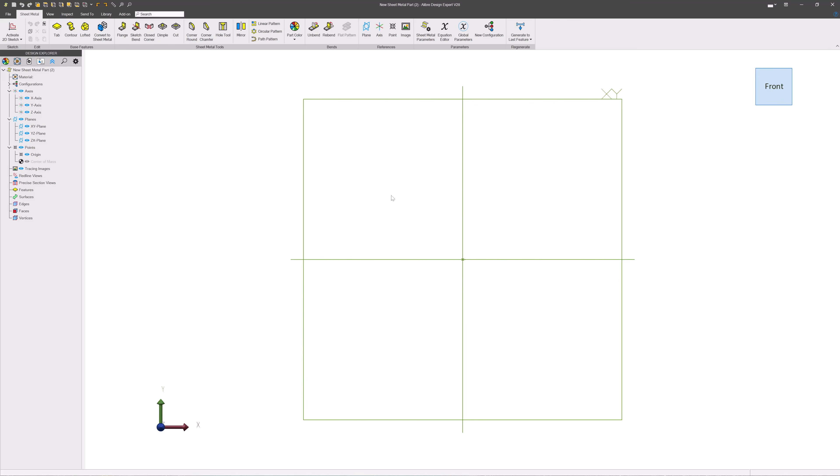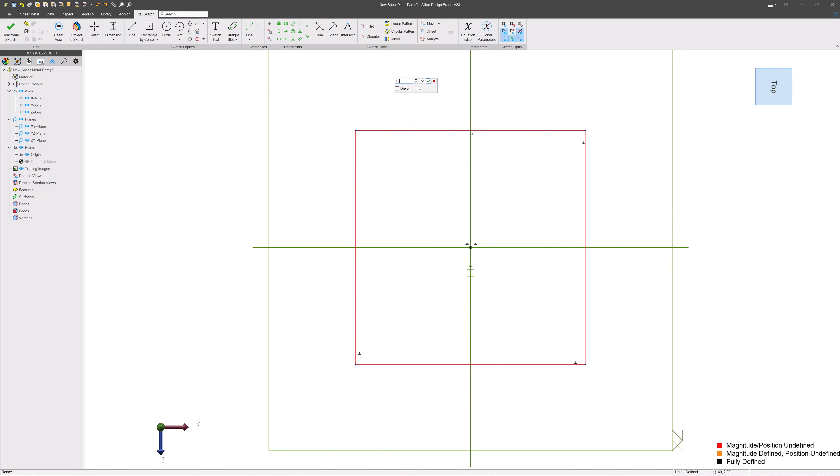So let's go onto this plane here and start a sketch. I'm going to grab a rectangle by center, and just start from the origin and form my rectangle. From here, I can grab a horizontal and make sure that one of my lines is horizontal. Then I'll grab a dimension and give this dimension, let's say 16, and we'll go 10.

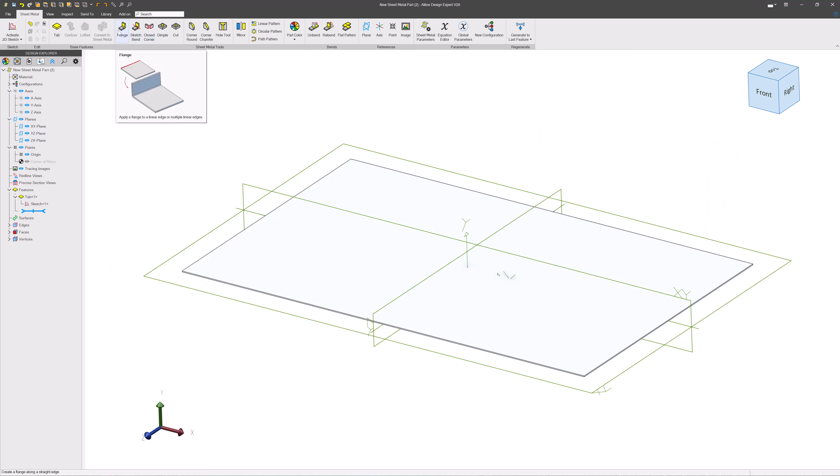Just like that. From here, I can grab a tab, so we'll say tab right there, and that forms a base part, or a base tab. So we'll grab a flange because we want to add some bends. Grab a flange right there, and just like that, we have made a bend.

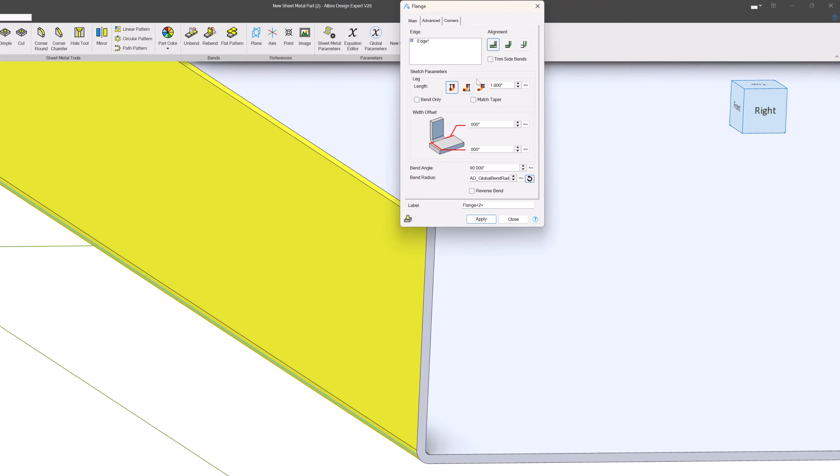Now, how do we want to make this? Well, I can say that I want this outer face to align with this edge, so we move the whole sheet metal part back a little bit and have this outer face be the new outside, like that. Or I could say I want this inside face to align with the edge that I just clicked, like that. Or we can say I want the bend, this little tangent point of the bend, to start at the edge that I just clicked.

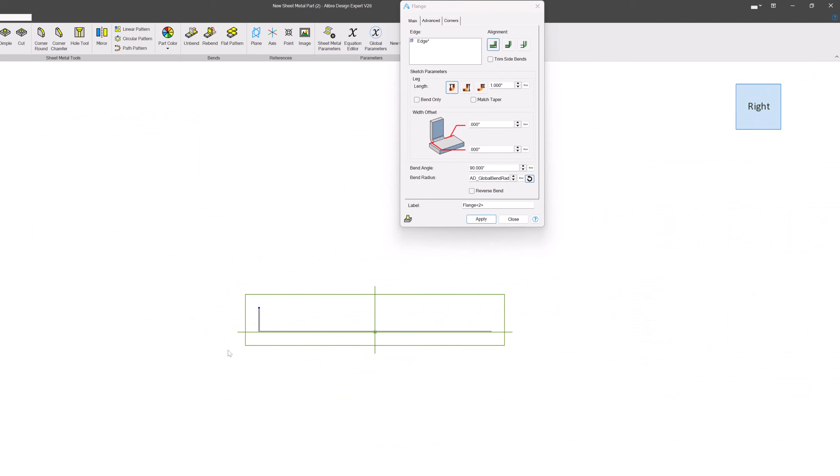So I have a few options to have dimensions, and you can see this blue edge that I clicked, how it aligns with that outside face. Here's that blue edge aligning with the outside face, my inside face right there, and then the tangent point of the bend, which is my favorite one. That's how I always do it, personally.

We can continue clicking. In fact, we can make a little box if we'd like, or I can deselect my edges if I decide that I don't want to do that. Either way, these are how we can make our flanges, and we can vary the distance by putting, say, a 5 there, so now they're all 5 inches up.

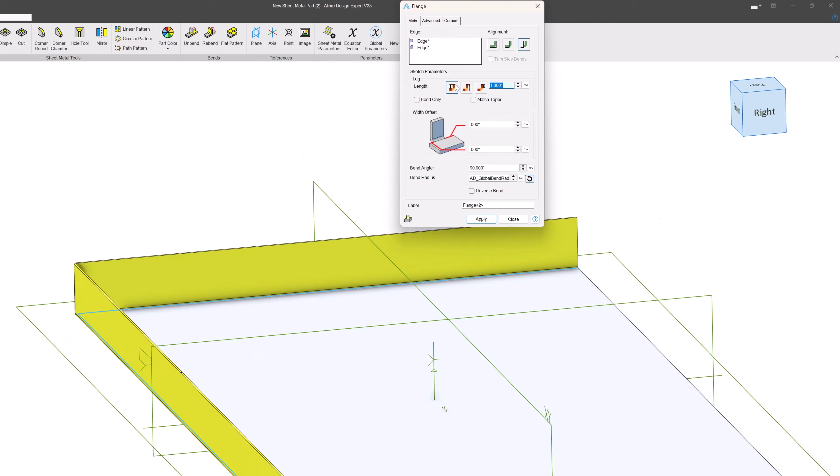Again, just like how we did the alignment, we can say, do we want the dimension off of this inside face, or do we want it to be off of the bottom face of our sheet metal part? You can see how we're changing length there as I click between them. Or do we want to measure from that tangent point on the bend, which gives us different options altogether. So you can see how we change length a little bit depending on what we want to measure from.

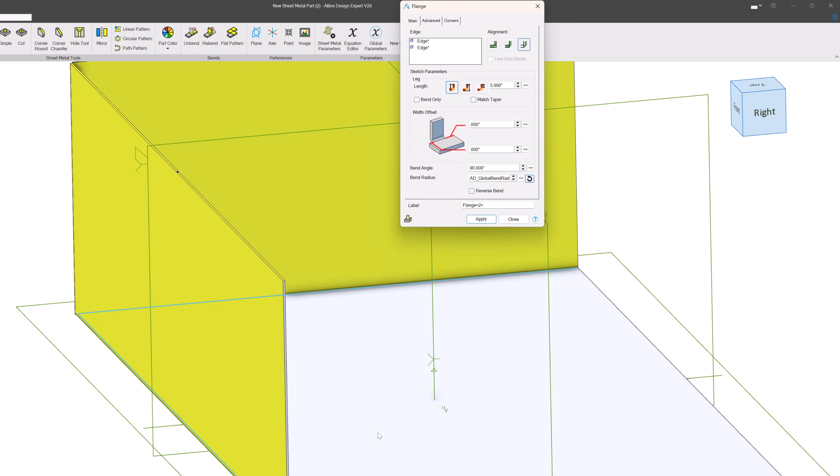I almost always leave that default because it's my intuition to measure off of this top face when I make the bend. We can have an option to have the bend only, so if I click on bend only, then we just get a little bend right there without any straight. That's really handy when we want to make hems. So I can say 180 if I want to hem it, and there's a pretty handy little hem.

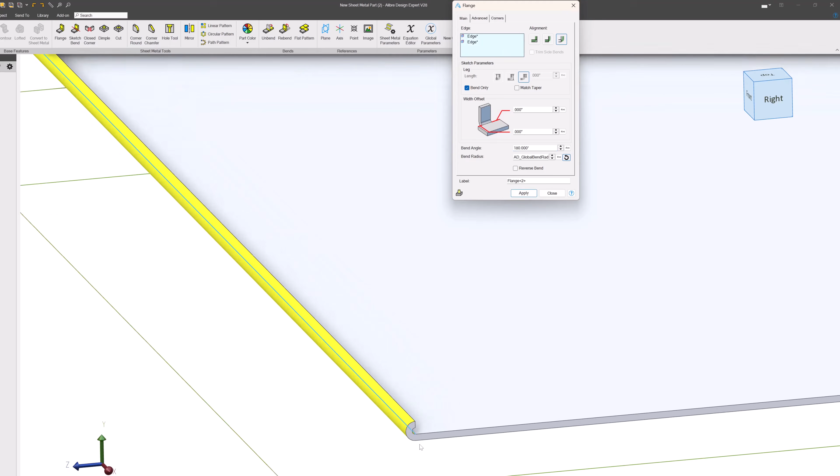Now if I go into the straight, again, we can see that we have a lot of overlap. Let's address that overlap because, of course, that part can't exist in real life. So we'll go to corners and add a miter, and with our miter, we can see that we've now cut a little gap between our flanges.

We can make our gap width, I don't know, 0.25, or we can make it really large if we'd like. We can also change different bend styles. Now I'll make this smaller, maybe 0.05.

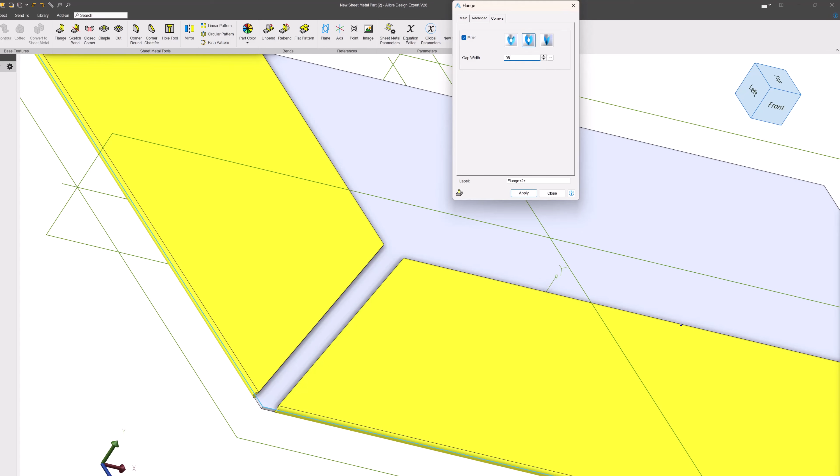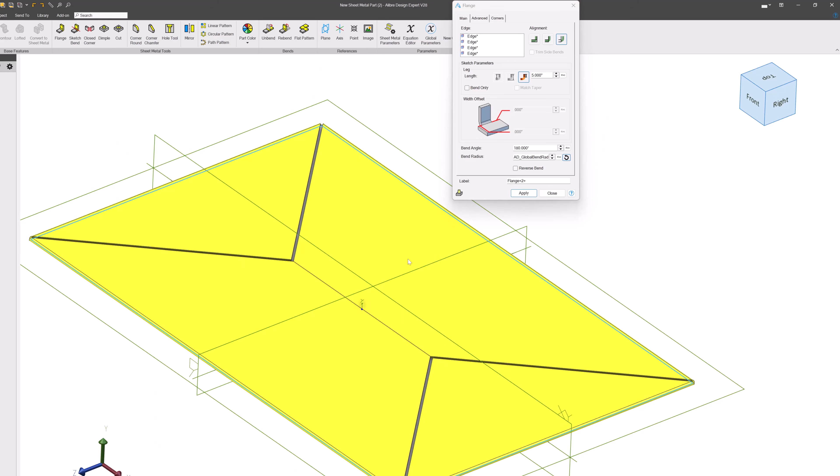We can see how we change the way that we bend things by these different options. That's how we can create these kinds of miters. Miters are really only going to occur when we're forming these flanges. So I can't click apply and then create another flange and miter that one. We miter things all together. So I can make this little pattern. I have no idea how you would bend this particular part in real life, but this does show how we miter things. I'll choose this and this, and we can change our angle.

What if I did 135? That might be achievable, but it's pretty standard to go 90. So, oops. And you say 90 in the angle.

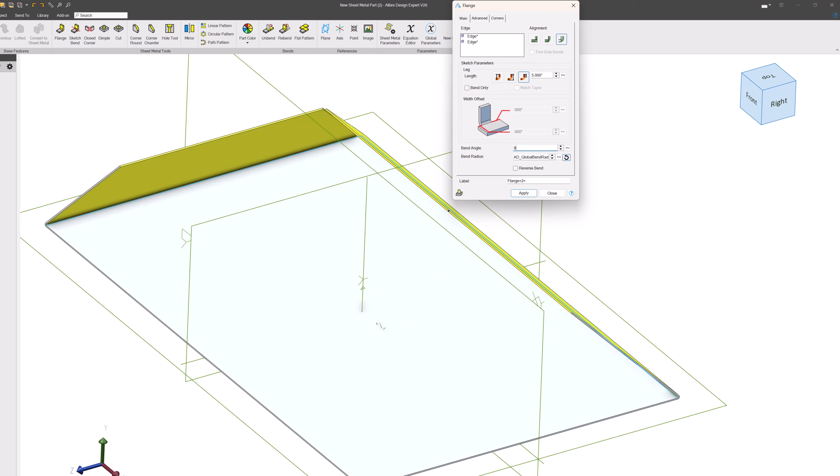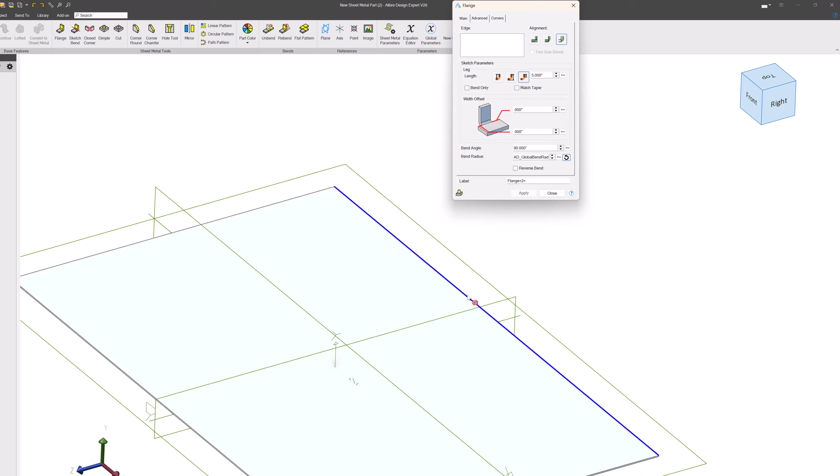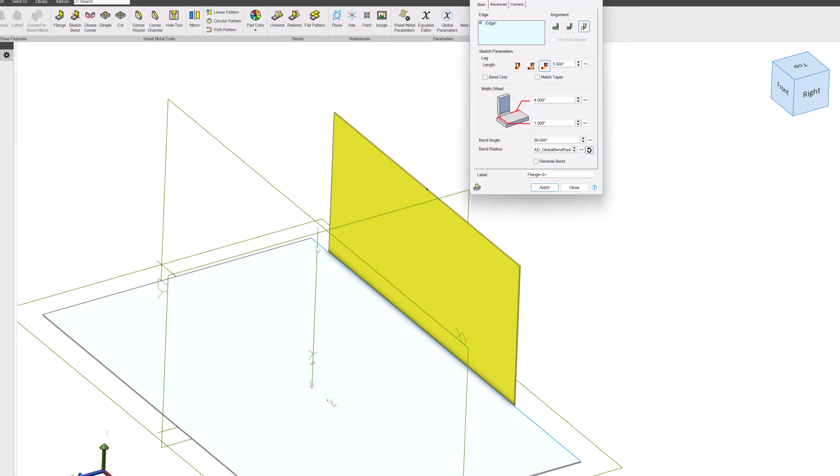Now I also may say I want a flange on this edge, but I don't want it to go the entire edge, so choose a width offset. Now I'm going to remove 1 because I can't do this on multiple flanges at the same time. When I do this on multiple flanges, you can see that these options are not editable, so I'll remove 1 and they become editable. Let's say I want to have it offset 4 inches on one side and 1 inch on the other. You can see that we're changing the length of our flange. So we'll apply what we have there.

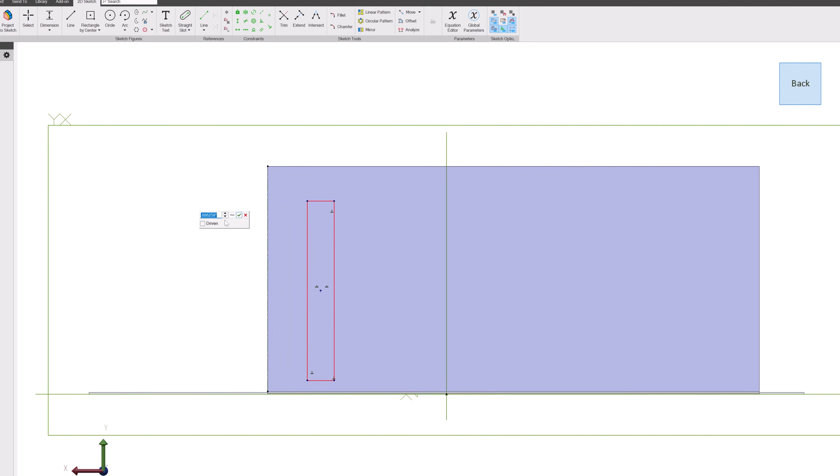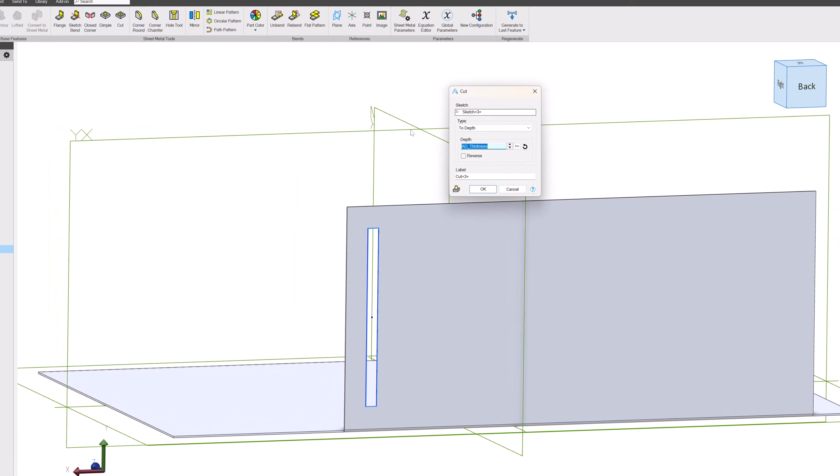Now maybe I'd like to have a vent on this face. One easy way to make a vent is to do a rectangle, and I'll choose a distance from this edge where I want this rectangle to be, 0.5 maybe. Right, we're just kind of offsetting. Let's go 0.25 there, and then I'm going to cut. And I just push this cut button and it cuts right through.

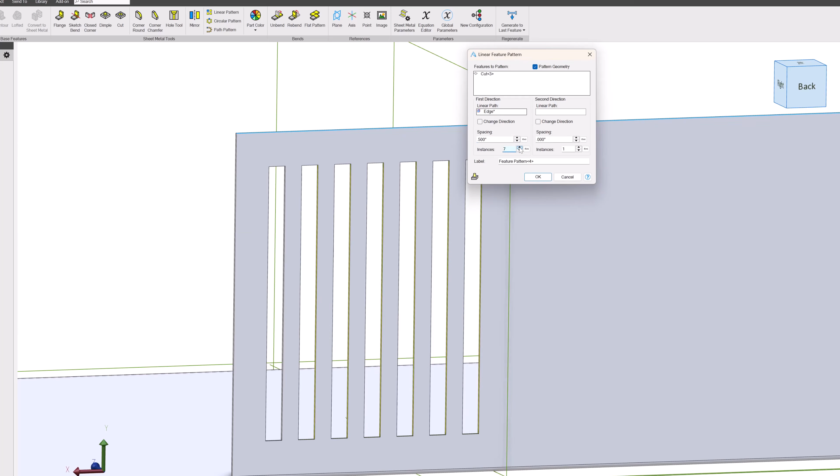Next, I might want to pattern that, so I'll choose linear pattern up here, and it asks me what path do I want to take, and I'll say I want it to go in the direction of this top edge. So I click on that top edge, and then I say I want these to be 0.5 inches apart, and then I can click the number of instances and make a pretty handy vent. We'll say OK to that.

Now, I can always click another edge and add another flange if I'd like. So I'll click on flange, click on my edge here, and apply.

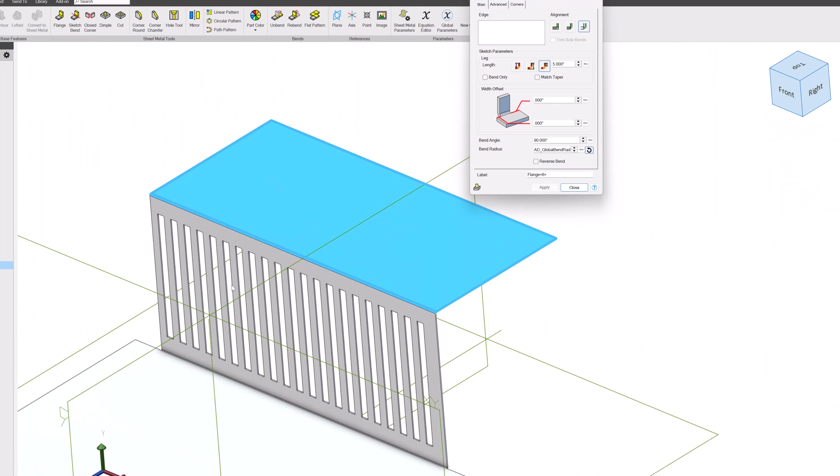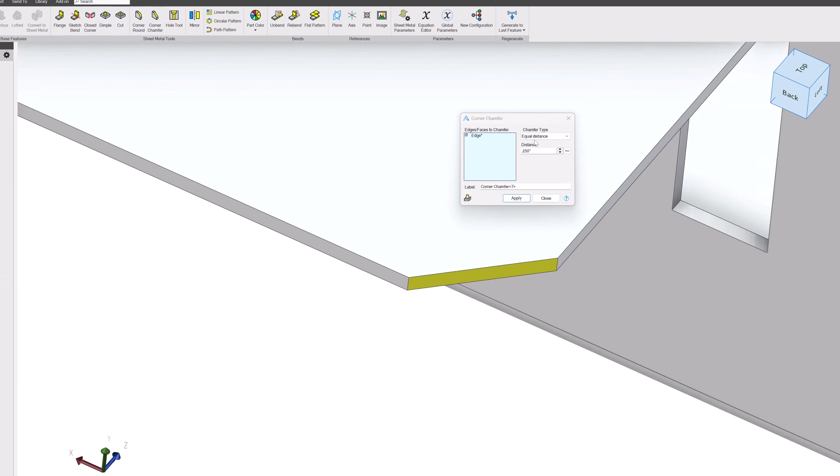Now I'm going to add some more flanges. I can, again, simply click and apply, or I can change the bend radius. Perhaps I want a very large radius here. I can put a 1 in, and we get a very large radius.

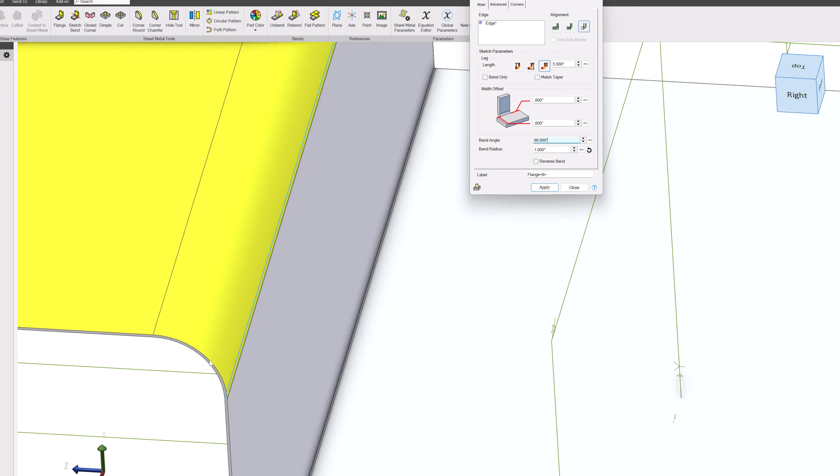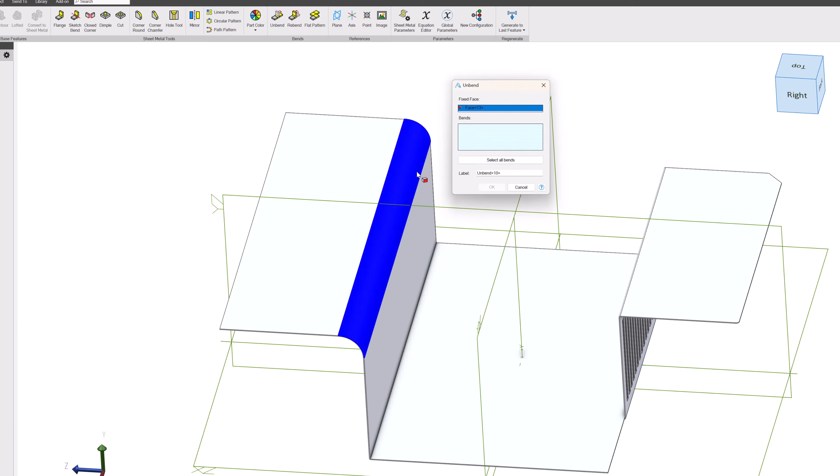And perhaps on this bend I would like to have a cut circle that goes right through that bend. Now that's pretty hard to apply, except for a little secret known as unbend. I can choose a fixed face, that'll be my face that doesn't move. And then I'll select this bend and we'll say OK. Except my face needs to be touching the bend that doesn't unbend, so we'll say unbend. Our fixed face will be this one, and then we'll select this bend. Or I can select all bends if I'd like to do that.

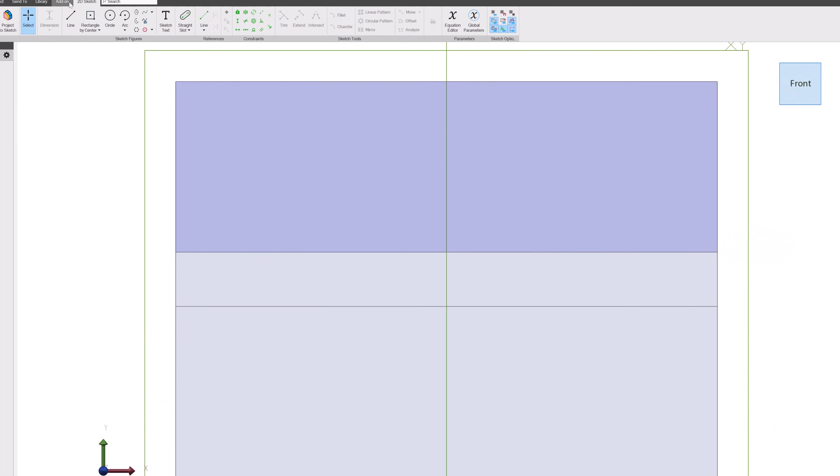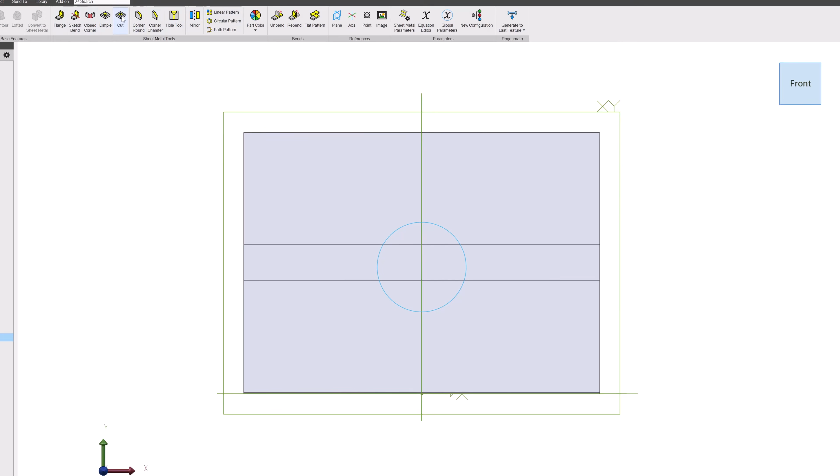We'll create a sketch on our unbent face. I'll create that hole. Again, I can give this a dimension of, say, 6 and 4. And we'll make a vertical with our hole center on the origin, and our circle has turned black. And we'll go with a cut, just like that.

Now when we're done, we of course don't want to leave it this way. We want a bent part that just had a circle on it. So we can choose rebend, and I'll select all unbent bends. And just like that, we were able to make our bend.

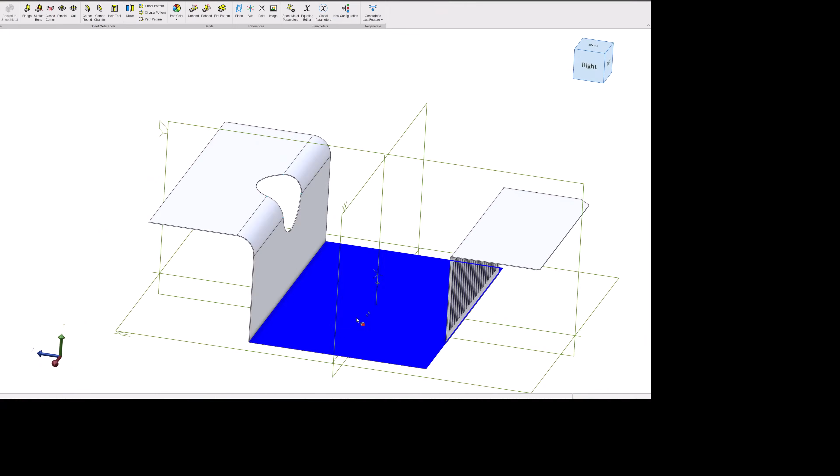Now we have a dimple tool. Maybe something gets stamped into our part. So we'll choose this. Dimples do not flat pattern, because sheet metal is based on developable surfaces. So we're going to deactivate this. We're going to go with dimple. And we can choose a depth here. We can go a little bit deeper if we want to, 3 times our thickness or something like that.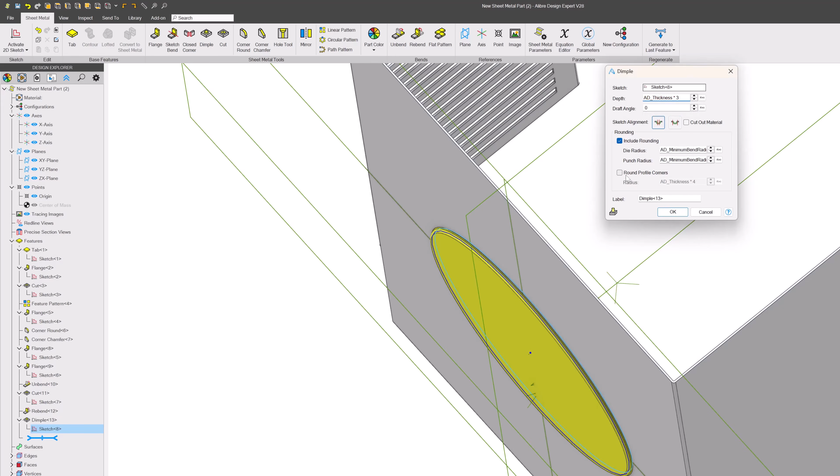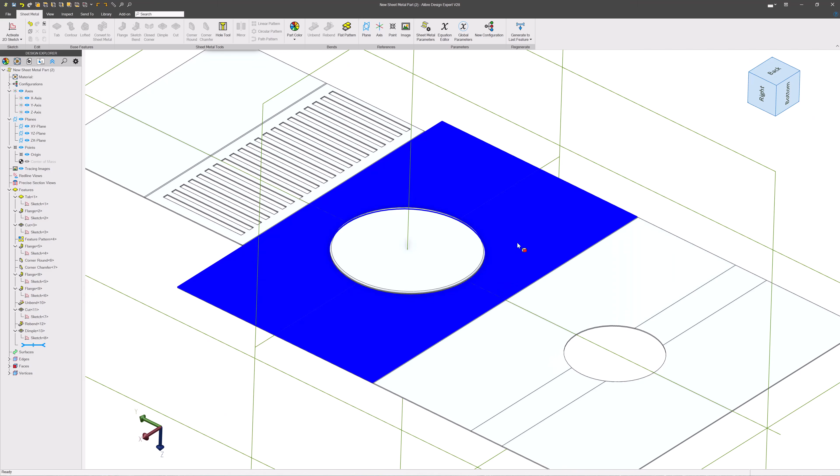When we say OK, we have just a little stamped out section that has some depth. Now when I go to flat pattern this, it doesn't flatten the same way, because this is more of a forming operation that isn't based off developable surfaces that unbend with sheet metal. These kinds of operations are generally applied before you bend, so there is the stamping, and then you can do the rest of the operations on the sheet metal part, but that's how that works.

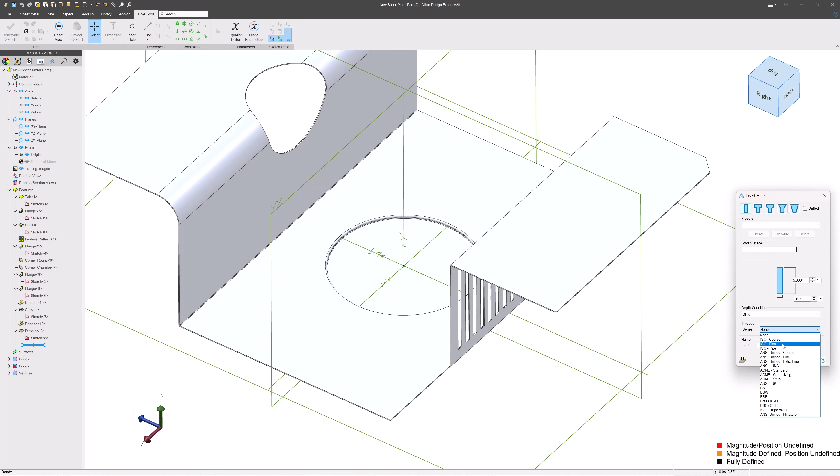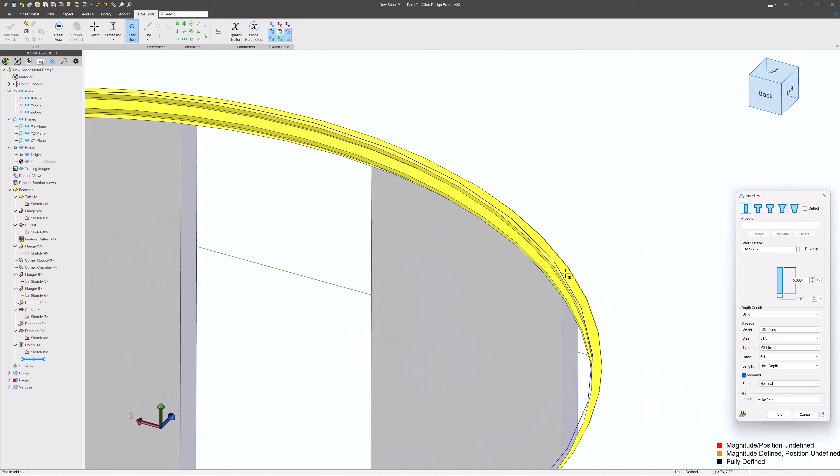We've got a hole tool, so if you don't want to make circles and punch through, we can select a hole. We can even do threads on this, so I can say ISO fine. We'll choose that face to put a hole on, and I'll make it a little bit bigger because that is quite small. There's a very large threaded hole, probably too large for this thickness of metal, but you get the idea. When we check modeled, we can actually put in physical threads that are modeled in, and we'll say OK.

Now we'll do flat pattern again. We can see that it still flattens out and we still have our physical threads. Pretty brilliant thing.

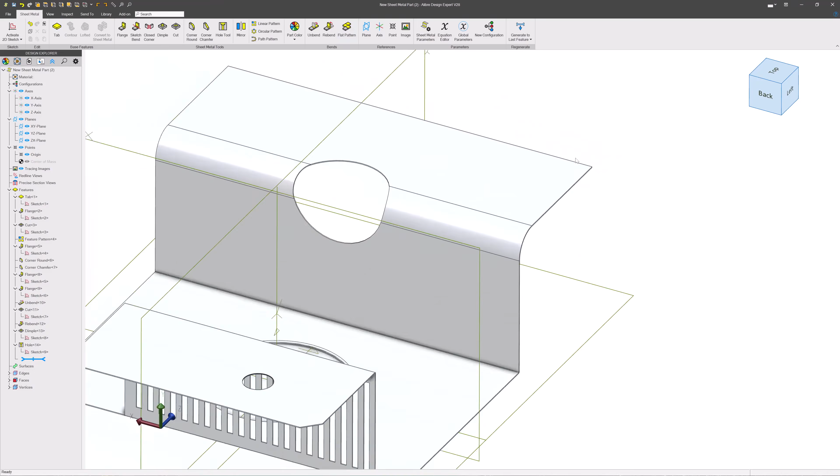Now we may have to make an eccentric bend. I have an existing flange. What if I want to make a diagonal bend across this? Well, that is still straightforward. We can activate a 2D sketch. One of the ways we could do it is, and it can be very helpful to have multiple ways of doing something, is I can just create a sketch - again, fully constrain that if you're in a serious project.

We'll make a cut, and I better edit my cut here. I can say through all to make sure we go through. And then I can add a flange right there. But as you can see, we add a new flange, and maybe that's not exactly what we want.

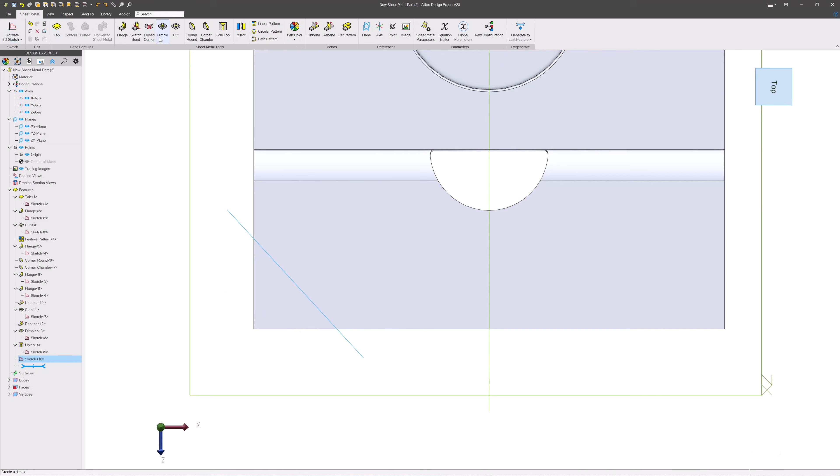So if we want to just fold the corner up, what I'll do is activate a sketch on this face. I'm going to make a line that goes across, right where I want to bend it. Then we'll choose Sketch Bend, and I'll choose my sketch as the bend line. And there we are, folding the corner up.

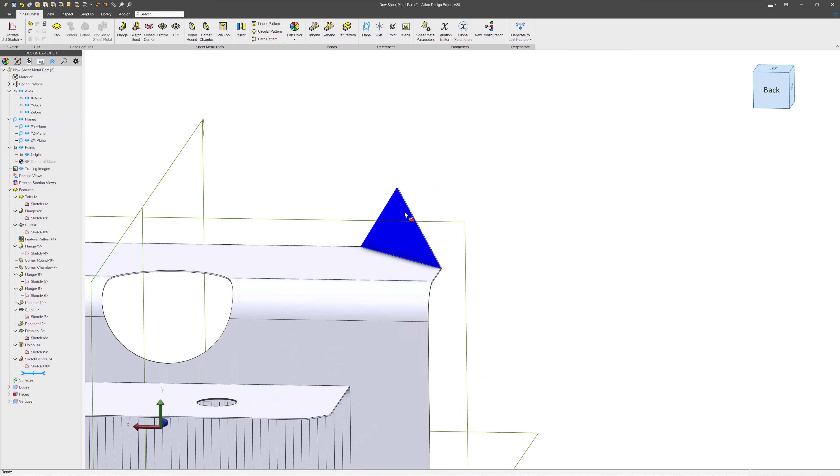So that's a great way to be able to sketch bend your existing sheet metal part. And again, we can flat pattern it to see the dimensions that we want to start out with.

Now, when we make these kinds of flanges, we can go to our flange menu. We can go to Advanced and see under Bend Allowance that we have the options for K-factor and unfold lengths to do dimensional compensation. The biggest thing is that when we open up our equations right here, we have our K-factor set to the correct value.

Now we can change our K-factor by going to sheet metal parameters, and 0.33 is a pretty good average K-factor. The material that you're working with will have a K-factor value that will help account for stretching or compressing as things bend.

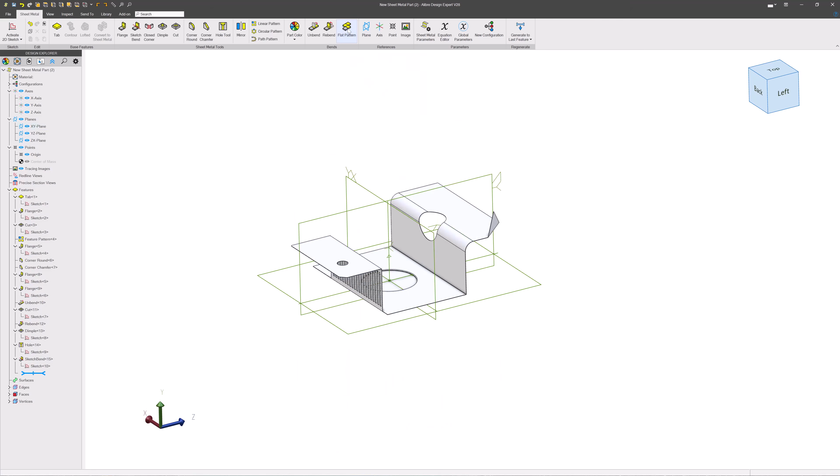So whatever value you put in there will make sure that your flat pattern has the compensations for compression and stretch through bends. So make sure you have the right K-factor value for the material that you're using, or that you use the unfold length correctly instead.

Well, these should be all of the really important ways of making fundamental sheet metal tools. So hopefully this was helpful to the user who asked.